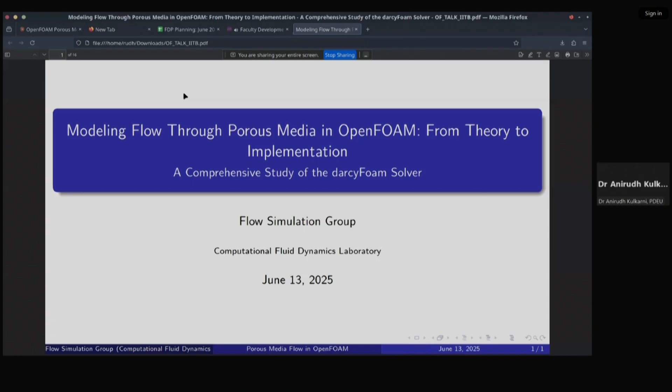If we briefly talk about the overall history of porous media, porous media, by the way, my PhD thesis was on porous media. I had used porous media as a passive way of enhancing heat transfer in a flat plate solar collector, and that is how I have been introduced to the porous media field.

So, if we talk about the history of porous media, it all started with the famous Darcy's law in 1856. I don't know if you know this, but in Dijon, France, Darcy was a civil engineer, and he was given the problem of designing the water filtration system for the city. And through that experience, he developed this particular theory. Almost 170 years of scientific development led to this point that we are at today. It all started with his empirical observations.

Later on, Forchheimer extended it in his 1901 works, and then Brinkman's viscous stress contribution of 1947 led to further development of this theory, and finally Ergun in 1952 put them all together in a broader perspective. Later on came Whitaker's volume averaging theory of 1967, and then Professor Vafai's interface boundary condition of 1981. Eventually it all led to the final porous media model that we see today, the extended Darcy-Brinkman-Forchheimer model.

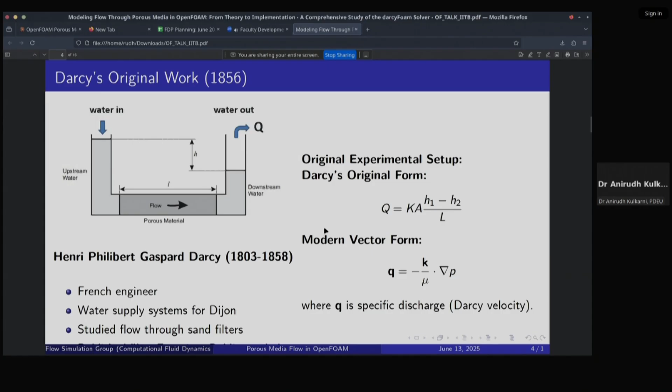So at the end of the day, what he came up with was a simple correlation for the flow rate and the pressure drop, and that is how he understood that there is supposed to be a resistance term which controls how easily or how difficult the flow is inside this porous medium, and later on this term was known as the permeability. So if the permeability value is high, the flow can easily pass through the porous medium, and if it is low, then the medium offers resistance to the overall flow.

All right. Later on, if we talk about the Forchheimer extension, Philipp Forchheimer was an Austrian hydraulic engineer. He made a crucial observation that Darcy's model is linear in nature, and it applies only for slow flows.

In the sense that if the Reynolds number is very low, where inertial effects are not significant, only then Darcy's law holds, and when the velocity or overall Reynolds number of the flow increases, this law doesn't capture the physics as it is. So he suggested inclusion of another term into this particular equation, which includes the inertial term,

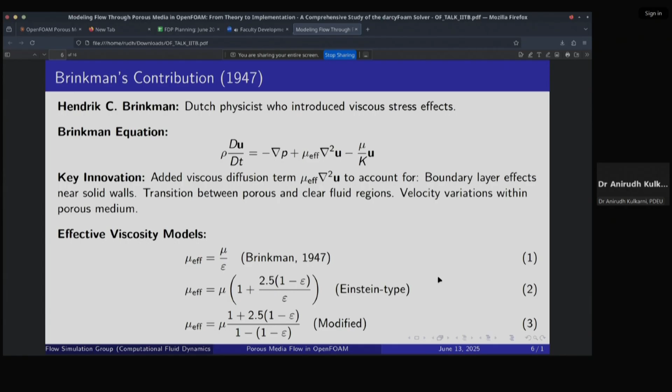In fact, even for a lot of applications, there is still debate as to whether to include this term or not. Because in many of the applications, it's not necessary. Even with Darcy numbers, we get sufficiently good results. And this discussion is still going on. It's not a dead end. It's still a relatively newer model, and is yet to be explored. Later on, I'll also present how it may be also wrong.

Because usually we may use permeability values like 10 to the minus 2, 10 to the minus 3 Darcy number values, the non-dimensional permeability, which is Da, the Darcy number is equal to K by h square, with h being the characteristic height. Now, it may so happen that we may use Darcy number values of 10 to the minus 2, 10 to the minus 1, and we may use porosity values like 0.6, 0.5, which isn't realistic, because for achieving that level of permeability, you need to have a certain minimum porosity value.

And this relation very beautifully gives that to us, meaning I may have zero permeability with one porosity. If all those voids which are interconnected do not appear out on the surface, the medium may still be impermeable, but may have very high porosity value. So it's very important for us to have the right porosity and permeability combination, and the Carman-Kozeny relation very beautifully gives that to us. All right. So that's the importance of the Ergun relation.

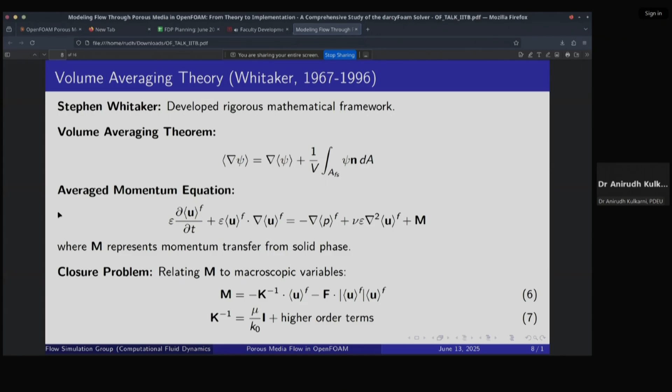But then there was again Professor Vafai's contribution, the interface boundary condition. That again holds a significant contribution to the overall porous media modeling, in the sense of how to effectively or properly couple the porous and clear fluid region, that they had provided, and that is again very important and pertinent to this particular discussion.

Now, if we talk about the overall concepts of porous medium, let us talk about a few fundamental properties. What is porosity? Porosity, as I said, basically gives us the overall idea of how much of the total medium is void. So for instance, if you have porosity 0.1, that means it's not so porous, and if it is 0.9, it's very porous in the sense that the voids are in higher number and occupy most of the medium. That is what porosity is.

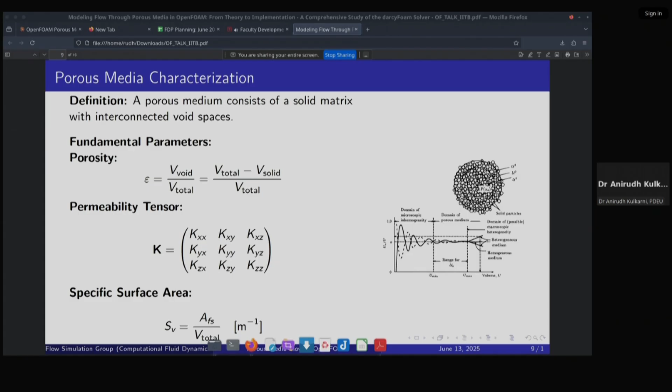And permeability, as I already mentioned, gives us an idea of how easily the flow can go, with tortuosity and all those things. But those things are not pertinent to our discussion because more or less these two quantities are sufficient for understanding.

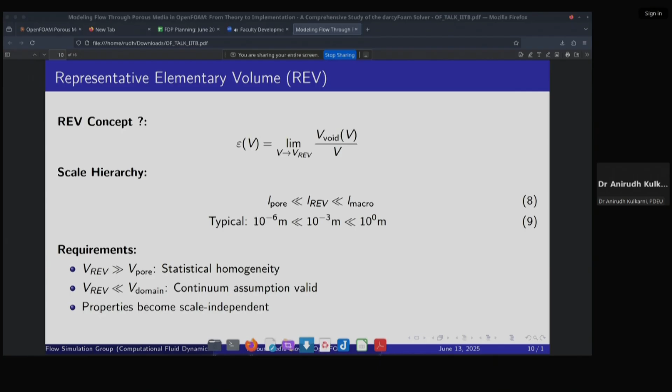All right. So representative elementary volume, also known as REV, is again a very crucial concept. It shows the minimum volume over which we can define some meaningful results, wherein we don't have to take the entire medium, and we can make sufficient correlations between the pore scale and the macroscopic results. So it's sort of like a play between them. So for scaling, yes, it's a very important approach.

And then again, this is another important point: Reynolds number. Based on the flow regime, you will have to take into account what particular formula to use, because it all depends on the kind of model that you are using. So we may have one Reynolds number for the macroscopic flows, one Reynolds number definition based on the particle diameter, one Reynolds number based on the permeability. So it all depends on which formula you are going to stick to. It's very important that you take into account the presence of the porous medium and then calculate the Reynolds number.

Say you are modeling mixed convection or natural convection, then when calculating the Rayleigh number or the Richardson number, you should take into account the presence of porous medium. Say you're modeling mass transfer, then for the Sherwood number, yes, you'll have to take into account the presence of porous medium. This is another mistake which researchers make. They take the macroscopic constants, which is incorrect, and we should take the constants along with the porous media terms.

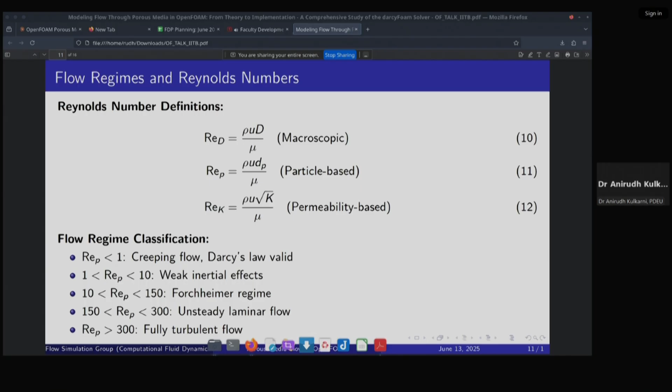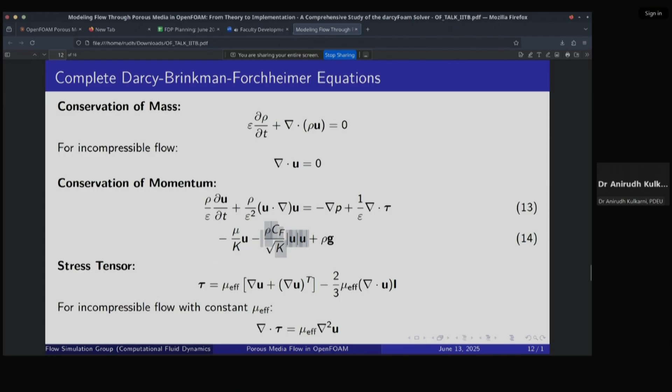So if we talk specifically about the extended Darcy-Brinkman-Forchheimer model, these are the governing equations generally when we model, wherein, as you can see, we actively introduce the epsilon, or porosity, term wherever there is any local variation of velocity. So in the momentum equation you will find that. In the continuity equation you should find the presence of this term, and then of course there are the source terms, the inertial source term and the viscous source term. Based on that, you can do the scaling and the non-dimensionalization accordingly. These are the parameters for that.

This is another example of a non-dimensional momentum equation based on the porous medium theory. I hope up until this point we are comfortable with the discussion that I've made overall on the porous media modeling technique.

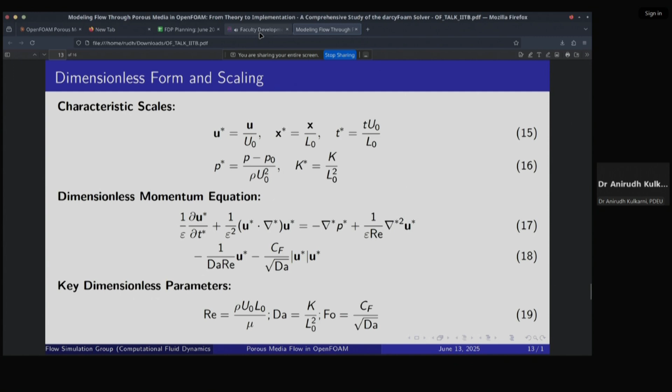All right. So, what about boundary conditions? At the walls, if there's no slip, we'll have no slip. But at the porous-fluid interface, we need to ensure the continuity of velocity and the continuity of normal stress. We may also include, say, the Whitaker or Ochoa-Tapia conditions accordingly, depending on the case. This is very important. Another common mistake researchers make when they write their own in-house code, or even when working with OpenFOAM: it's very important that we take into consideration the interfacial treatment, and one needs to take an appropriate model for that.

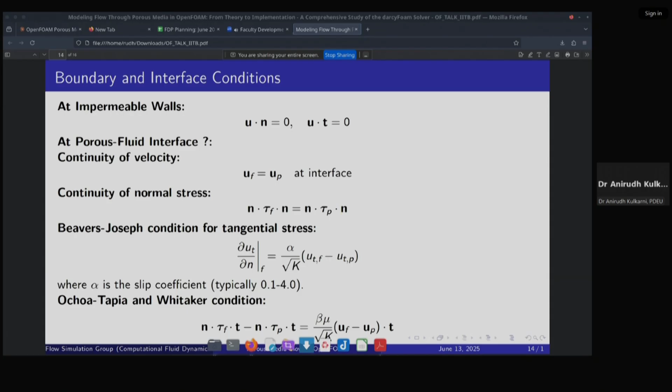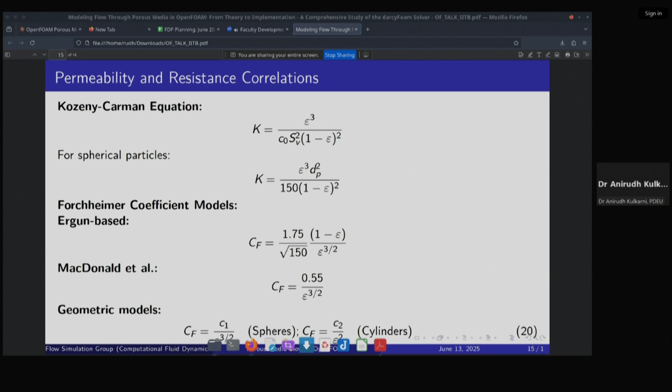All right. So these are the relations for further calculating the permeability to microstructure for, say, practical applications and so on. Again, we have talked about this before. So let us directly go now to the OpenFOAM implementation. In the OpenFOAM implementation, the changes we will have to make are that the discretization and the pressure correction will have to include the local porosity term.

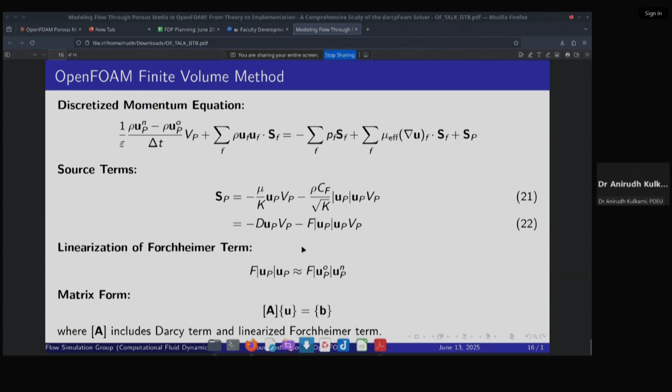I think I should now stop with the presentation and directly share the screen and show you the solver so that we can have that discussion. So here is the solver. I've taken the liberty to write a very abridged solver so that I can explain it very easily. So we will have the usual things, and this particular inclusion of the header file would be there to take into account the existing porous media library in OpenFOAM. Other things are there as usual.

Now here, the create fields I've optimized a little for performance, and I pre-declare a couple of things for convenience. So we would need two additional fields. One is porosity index, and another is porosity. Why? Because a general finite volume solver of OpenFOAM will not be able to identify it; rather, we should create a mechanism for it to identify the porous region and the clear fluid region, and then assign the porosity value or the porous properties to it.

So we will include a porosity index, which will be zero everywhere by default, indicating a clear fluid region, and whenever we come across the porous zone that we will create by using topoSet and setFields, in that region we will set this porosity index as 1, and then it will identify that zone as a porous zone, and accordingly we can assign it those set values. We'll have the pressure field, the velocity field, and the other things as usual. From the create fields, I have created a simple laminar case for a Newtonian fluid, nothing fancy.

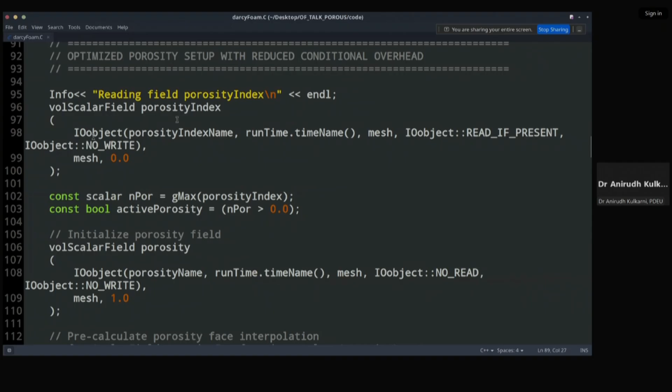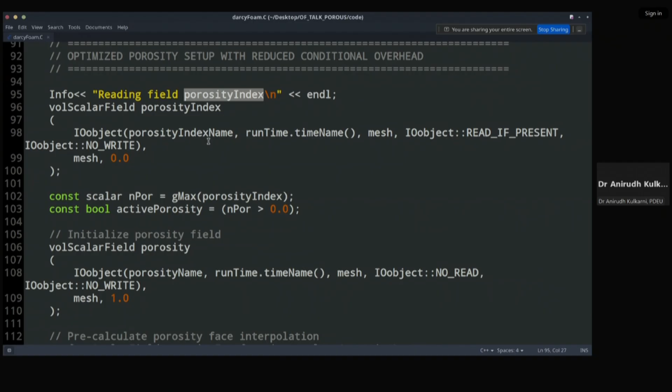But yes, here, this is new, in the sense that we'll create this field, and during the runtime we will read it, but obviously not write it, so that we can make sure each time the porous zone is there, and we can keep assigning the property to it. This is the modified portion. The concept is very simple actually. Once the solver identifies the porosity index as either 0 or 1, we can give the porosity value to it, and based on the porosity value, the solver may assign the corresponding properties from a particular file in the constant folder.

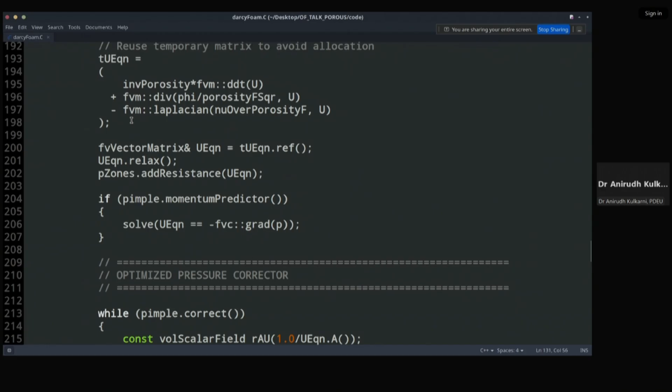I will also show that now. So other things are as usual. This entire thing is modified. The idea is, as I've told you, it will look up and it will assign. Simple. So this is simply the PIMPLE loop. And here is another modification, in the sense that whatever porosity value we fetch from the solver should also be included in the governing equation.

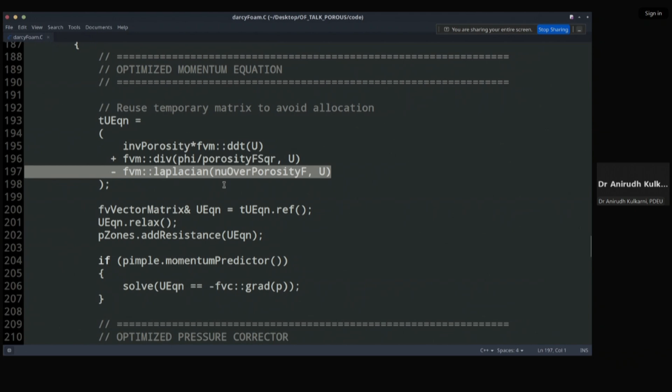Meaning, if we have dU/dt, this U, the macroscopic velocity, when it enters the porous medium, should be divided by the local porosity. So we'll have U by epsilon. Similarly, in the divergence term, we have U dU/dx, so we'll have U by epsilon times dU/dx times 1 by epsilon. So overall it becomes 1 by epsilon squared, and that is reflected here through this term. The same applies to the Laplacian term. Likewise, it should also be included in the pressure correction, and that has been done.

So that we can get overall the local velocity variation effect, and other things are again the same. I mean, not much to show there or discuss there. So once we compile this code, I have created simple cases. Let me demonstrate one case to you, say the impermeable case. This is completely, I mean, the cylinder is completely impermeable.

So in 0, we'll have the regular p and U. And apart from that, we'll have porosity and porosity index as discussed. So by default, if you see, porosity is 1 everywhere. That indicates the clear fluid region. And porosity index is 0 everywhere. That indicates the clear fluid region.

And when we run the blockMesh and topoSetDict and setFieldsDict, it's 0 everywhere, but then at some points it becomes 1. That indicates the porous region. And a similar thing happens to the porosity. So this is what is happening in 0. Let me directly go to the constant. In constant, again, transportProperties as usual, nothing fancy happening there.

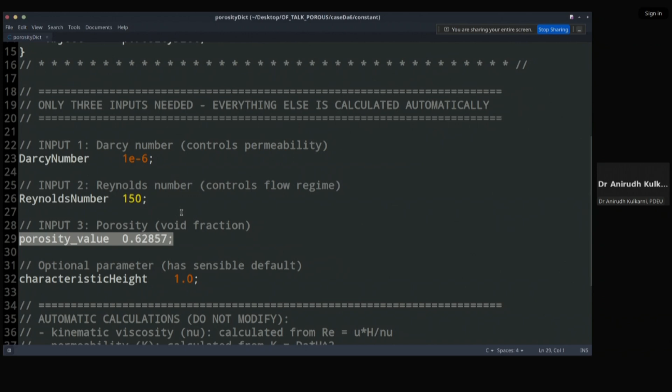We need these three files. So here is where we will be doing the changes as required. You may define the Darcy number, Reynolds number, porosity value, depending on your requirement. And again, this porosity value and the Darcy number, these values you can get from the Carman-Kozeny relation, which has been mentioned here. The Forchheimer term, the D and the F, how they are calculated, and the Carman-Kozeny relation. By using that, you can update these values so that it becomes easy for you.

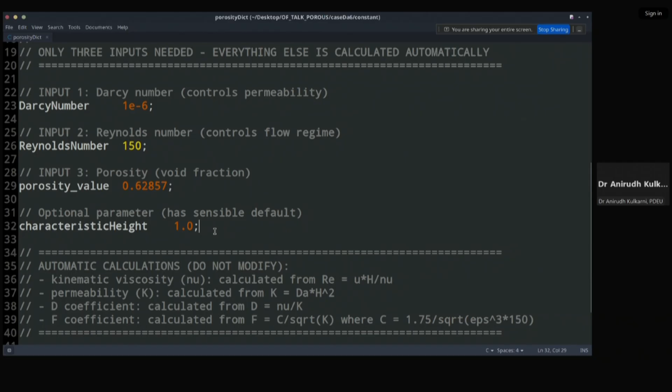And these values then will be included ultimately here via this file. And this is what is interesting. Based on whatever values you have mentioned here in porosityDict, these will be automatically calculated. For that, I have written a simple Python script, which is this. So if you run this Python script, automatically this file will be updated with the values, and this script has the Carman-Kozeny relation inbuilt into it.

Obviously, this is an overkill. You can do it manually as well, but it beautifully automates things so that all the parameters can be calculated immediately and placed accordingly. So, for instance, this velocity I can go and place in U based on the Reynolds number. But then again, it's up to you. You can do it manually as well. But yes, we would be requiring these three files additionally.

And then in system, literally nothing has to be done, in the sense that only blockMesh has to be modified for modeling maybe the cylinder case or cavity case, whatever you want to model. Currently, I will demonstrate a simple flow across a circular bluff body. So let me quickly open ParaView and show it to you.

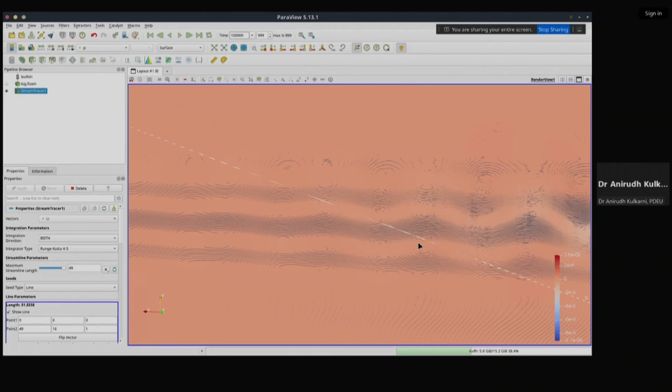So just to quickly show you, as you can see, the streamlines are entering at some points, but they are not leaving the cylinder. They are just there, being calculated for the sake of continuity. This doesn't make sense. Then there is a wake, and that's that. So that's Darcy number 10 to the minus 6, and the CL-CD oscillation would look something like this. Pretty simple, straightforward. Let us then talk about 10 to the minus 4.

So in the case of 10 to minus 4, what changes can I do here? First thing, you go to constant, porosity properties. Oh my bad, porosityDict. In porosityDict, you change it to 10 to minus 4. Run the Python script. Automatically, all these values are entered. As you can see, these values are very much different than these values. The D and F value has been changed.

Right? So how is this different from the conventional OpenFOAM solver? Very simple. In the conventional OpenFOAM solver, D and F, are they there? Yes. But what is not there is the inclusion of porosity. In the governing equation, in the overall code, it's not there. So that seamlessly comes, yes. And then the interfacial treatment, yes. So that continuity comes very nicely in this particular solver, and that is how you can do it.

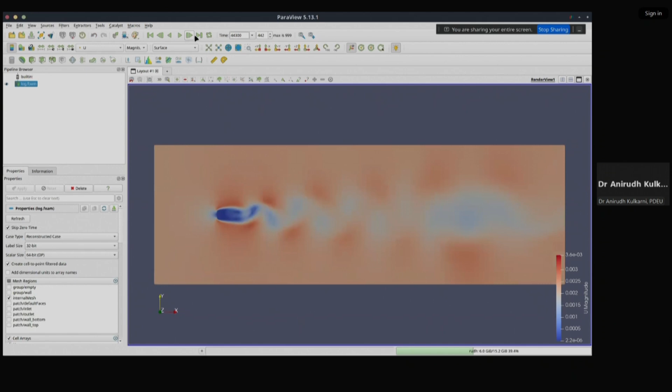Now, if you notice, Darcy number 10 to minus 6 and 10 to minus 4, the flow pattern, they're almost the same, not many differences there, to be honest, because they are almost similar in the sense they offer very high resistance to the flow, so the flow almost does not enter the cylinder. Let me quickly plot the streamline and show you.

So here, as you can see, in comparison to 10 to minus 6, yes, there are more streamlines that are entering inside and leaving the cylinder, but not from behind, from the side, showing there is still some resistance being offered to the flow. Mostly these streamlines will be limited to this region and not leave from behind. That means it still shows quite enough resistance to the flow.

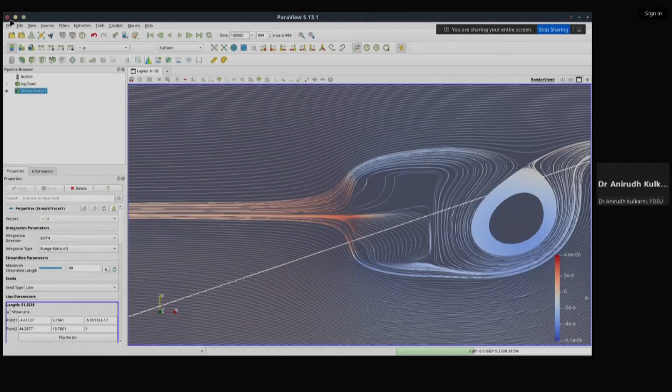Then if we talk about the CL CD pattern again, we can see changes in that as well, in the values and all those things. Let us then talk about 10 minus 3. Again, the same drill: change the values, run the Python script, the values will be updated, right? Directly run it for now, and here you will start to see something very interesting.

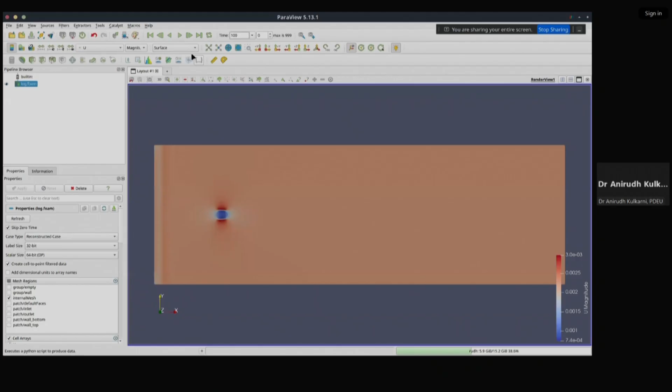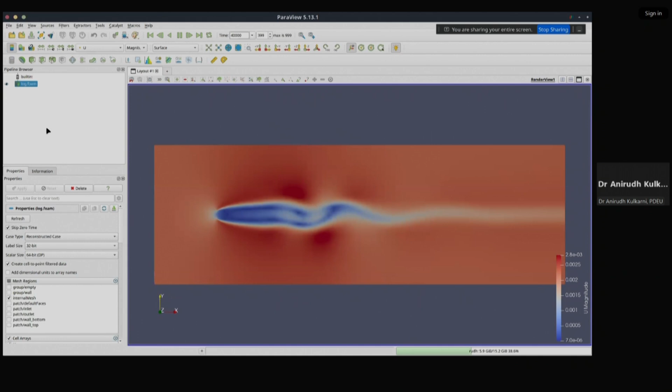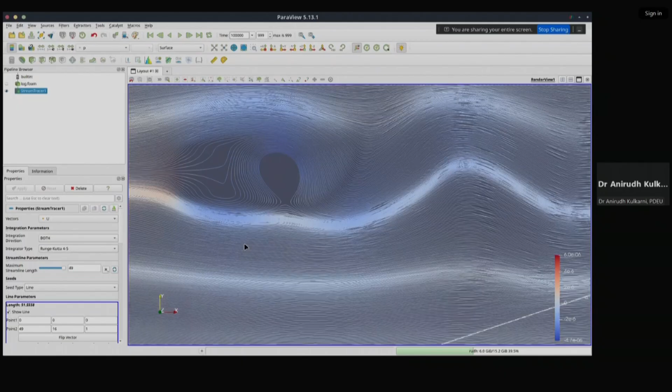Now you see in the cylinder, the flow has started to enter, and hence the physics also has now changed significantly. So the wake pattern is also a little different in comparison to 10 to minus 6. Let me quickly show you the streamline patterns. Now, as you can see, in comparison to 10 to minus 6 and 10 to minus 4, a significant amount of wake enters and leaves the cylinder, and therefore, obviously, there will be a change in physics.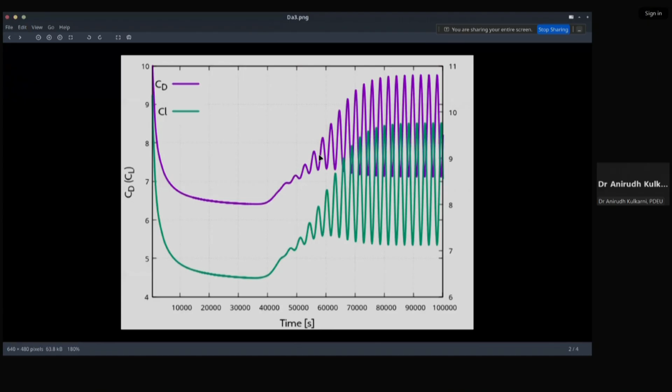And let us go to 10 to minus 2 and 10 to minus 3. You will see this is how the CL CD pattern will be. Now let us talk about 10 to minus 2. Obviously, as you can predict, 10 minus 2 is a very high permeability value in comparison to 10 minus 6.

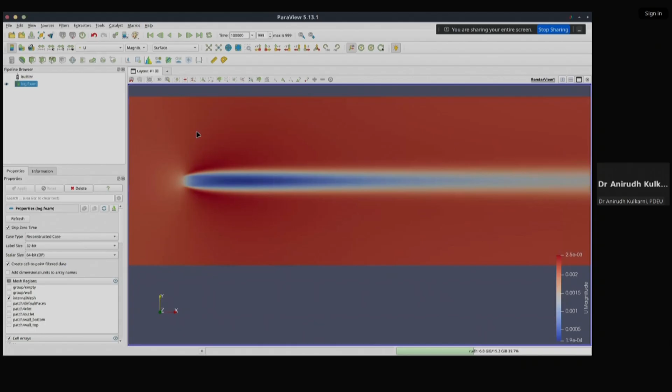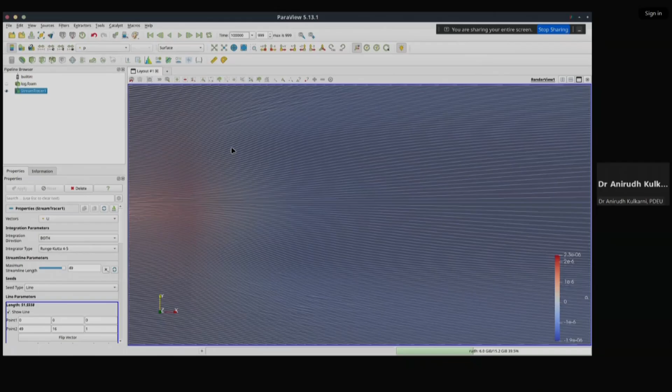So much so that now all of the flow would have entered and left the cylinder with almost no resistance to the flow whatsoever, and you would see no wake pattern behind, no vortex shedding behind, and this is how the streamline would look. You can see there is some resistance. The flow is still bending a little. It's not like there is no resistance at all, but this is a quasi through-flow condition that you can see here. And this is quite evident from the CL CD patterns.

All right. So to sum it up, if you want to build your own OpenFOAM solver for porous media flow, you'll have to take into consideration not only the extended Darcy-Brinkman-Forchheimer model, but also the local porosity variation. This was an external flow case, so you may not see much difference if you remove or keep porosity values. But if you talk about internal flow, or even external flow where the porous media presence is significant, then you will start to see this difference in your solver.

So it's very important that we take into account the state of the art models and implement them, and how to implement them I have shown you.